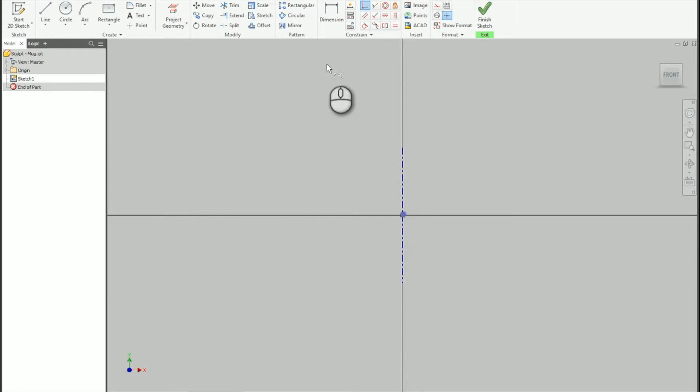I'm just going to create the geometry that I need to make this into a revolved surface. I'll get this centered here, put in the size of the mug that I want, and put in an arc, which is going to be the actual side of our mug. Once I get that in there, we'll constrain it down with some horizontal and vertical alignments.

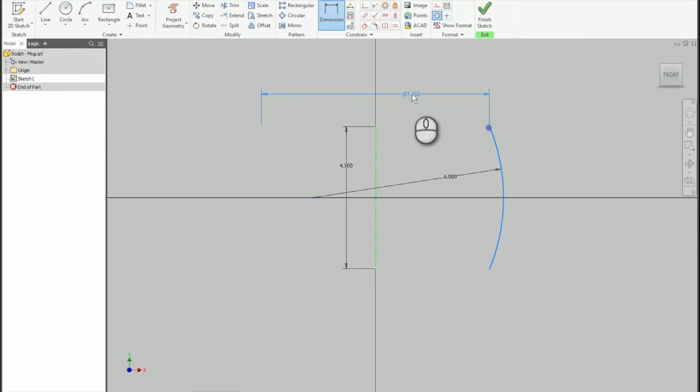So I've got that going. I'll just do a vertical alignment there. Then we'll get the size of the mug by choosing the center line and the end edge there, and I'm just going to put in that diameter, and we're good to go.

Now I'm going to start the revolve command. We're going to revolve it just as a surface. I'm going to pick my profile and my axis, and there we go. We have the side of our mug.

The next thing I'm going to do is patch the top and bottom. I'll patch the top first, then the bottom, and this way we've got a fully closed object.

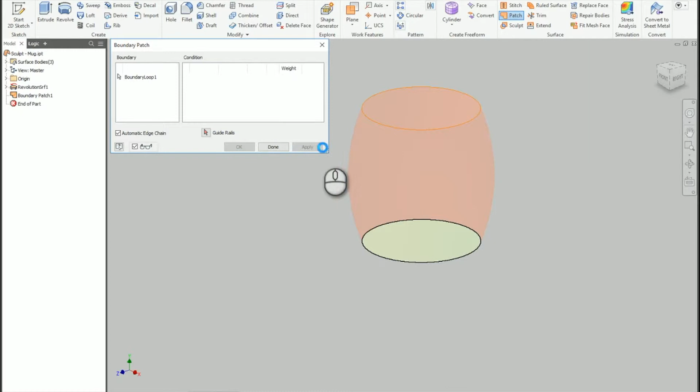The next thing I'm going to do is add in the handles. For this one, I'm going to go to another work plane here, draw on a couple of arcs, and project in some geometry here.

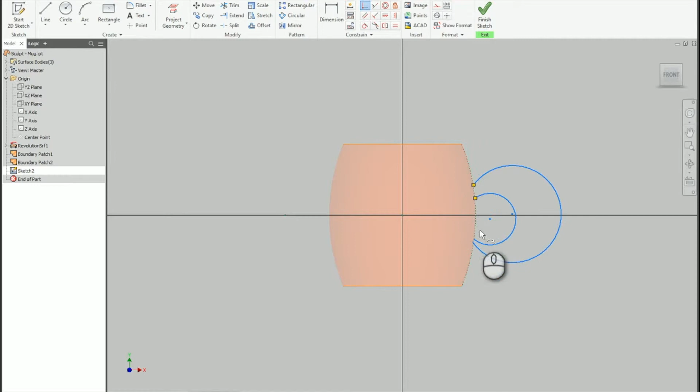I'll change that over to construction, and anchor these down. I'm just going to anchor a couple of points here, then make sure that these two are lined up and constrained down. I'll put the sizes on them.

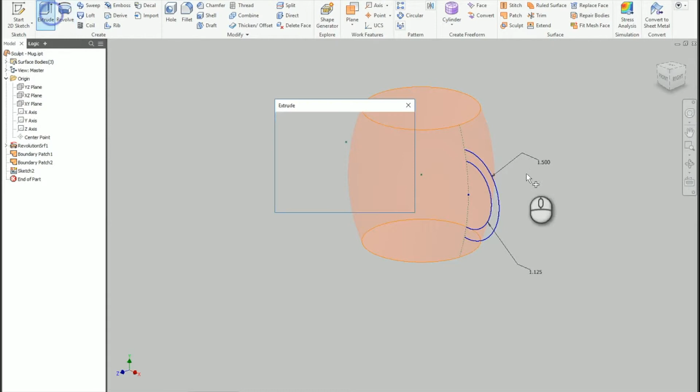There we go, and now I'm going to extrude those surfaces. I'll extrude the top one first, and accept that.

Now I'm going to have to go and expose the sketch here, turn the visibility back on so I can extrude the bottom one as well. I'm going to go mid-plane on that one so we can do that. Now that I'm done with the sketch there, I'm just going to turn the visibility back off.

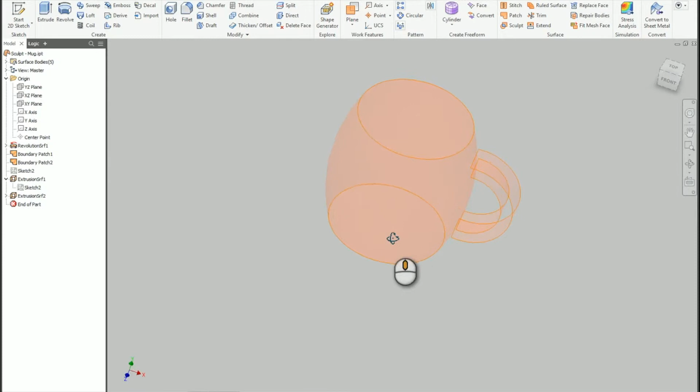Something I want you to notice, and I did this on purpose, was I did not have the actual line go through the barrel of the mug, so you'll notice there's a little bit of a gap here. To close that gap, we're going to use something else called a ruled surface.

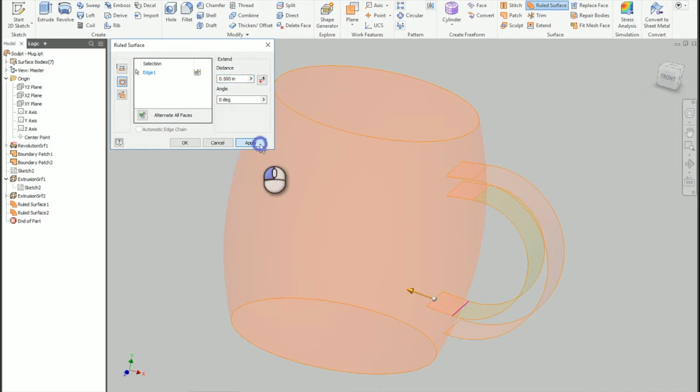This command allows us to extend surfaces. I'm just going to make a couple of selections here, then pick the edges that I want to have extruded further so that I know for sure it's going to be a fully closed surface. That's a key thing for doing sculpts.

Alright, so the next thing I'm going to do is the profile of the handle here. I'm just going to draw a couple of arcs, and I'll have to go back and make sure I attach this one here. So hold on a second. There we go, I ended up missing this as I did that.

I'm going to make sure that I make this tangent, and line them up nicely with a couple of constraints just to make sure this doesn't go too far out of alignment. I'll put on some sizes here so that it's working, and make sure this stays in the center for both of these. Pick this one and divide that by 2. There we go.

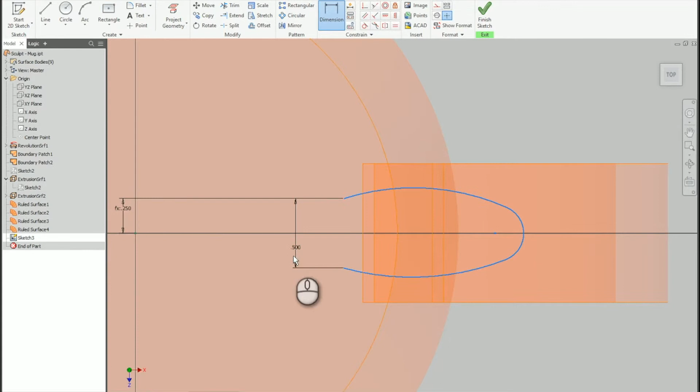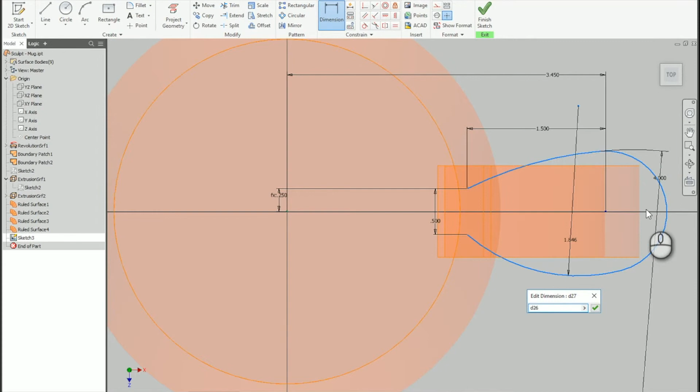Put on some dimensions here to have it stretch out. We'll say this is going to be 1.5. Then we'll put on some other sizes - this will be 4 inches, that'll be 4 inches as well, and this one here we'll make 0.3. There we go, I'll finish the sketch.

We're going to extrude that one, same idea. I'm going to make it go midway and go from top to bottom, so 4.5 for the height that I did from before.

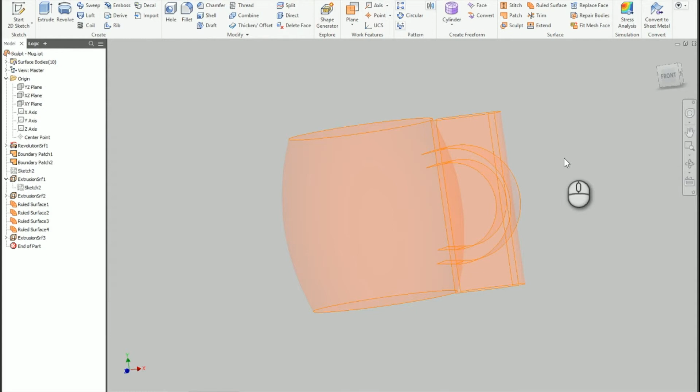We are going to have a slight issue here with the handle, so to make sure that our hand can actually fit inside of there, I have to go and do a trim. I'll pick that inner, or lower arc, for the handle, and trim away the excess material that I don't need so that we have something like this.

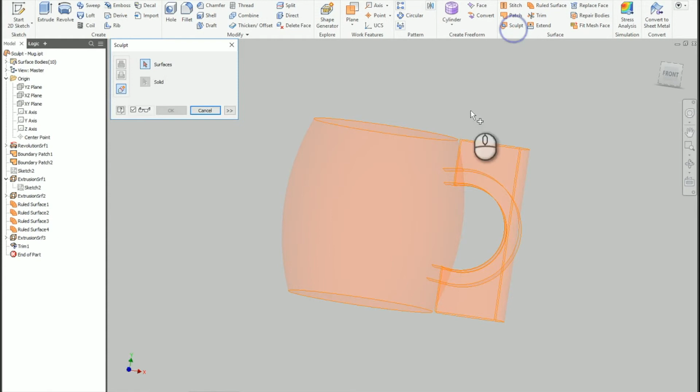Alright, so now this is ready for us to do the sculpt command. All we're going to do with the sculpt is simply pick the surfaces that we need, and by picking those surfaces, it's going to allow us to create our mug.

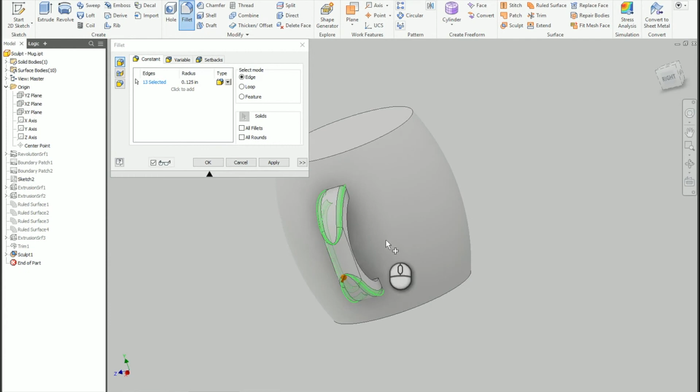It's going to be a little rough at first, so you can see it's a little bit rough here. All I'm going to do is clean it up by using a couple of things, in this case fillets, to make it nice and cleaned up. We'll do the first set of fillets here, and then another set right there.

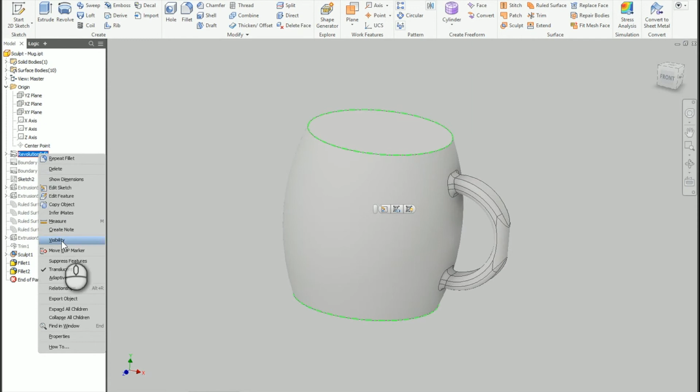It's not a mug without having the center there, so what we're going to do is shell it out. But to shell it out, I'm going to simply do a surface split. To do that, I'm going to go inside of here and expand, or turn on the visibility of this revolution I did from before for the initial side there. I'll run the split command.

I'm going to change this to split solid, choose that, and there we go. I can turn the visibility of that back off now that I've done that. Simply pick the shell command, and there we go, there's our mug.

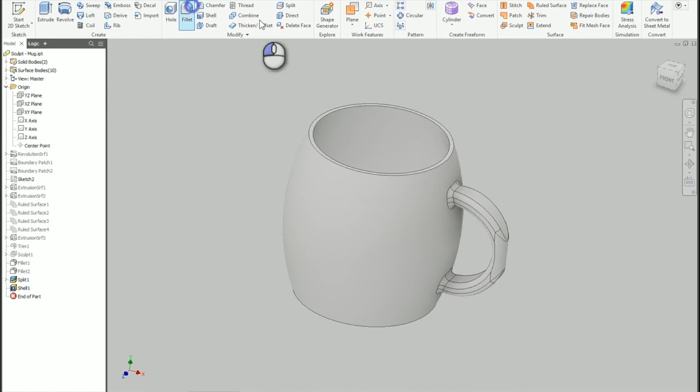Again, I'm just going to do a little bit to clean it up here, and then that's it for the video. Okay, so go like that, and there we go. Look at that, nice mug.